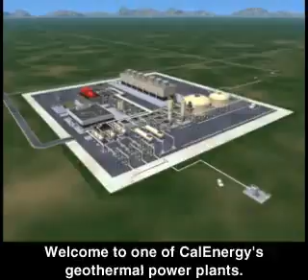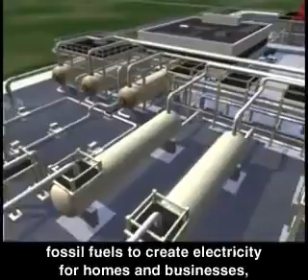Welcome to one of CalEnergy's geothermal power plants. Unlike other power plants that rely on coal or other fossil fuels to create electricity for homes and businesses, geothermal power plants use superheated fluids from the Earth's geothermal resources to generate electricity.

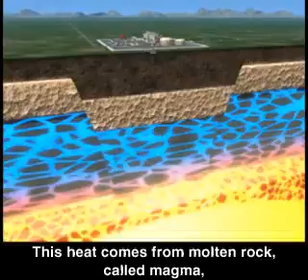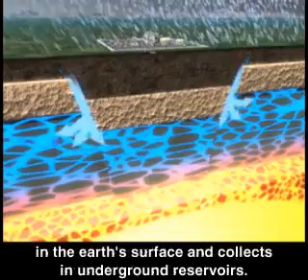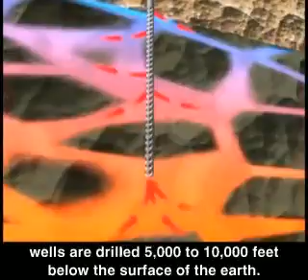To reach the superheated fluid, wells are drilled 5,000 to 10,000 feet below the surface of the Earth. These wells, called production wells, bring the superheated fluid to the Earth's surface, where it can be used to generate electricity for homes and businesses.

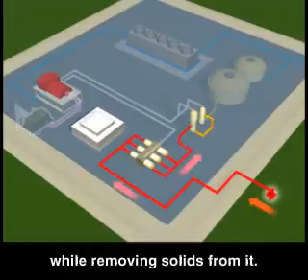This geothermal power plant uses crystallizer reactor clarifier technology, a process that turns the geothermal superheated fluid into steam while removing solids from it. The steam is used to drive a turbine and generate electricity. All remaining geothermal fluids are injected back into the reservoir for reuse.

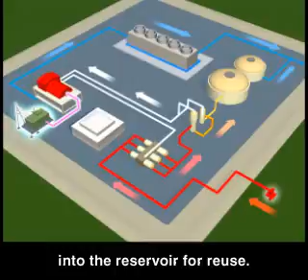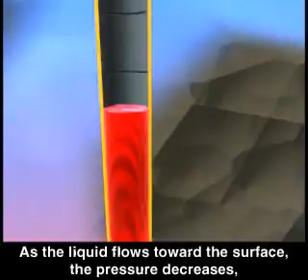Under its own pressure, superheated fluid from the geothermal resource flows naturally to the surface through production wells. As the liquid flows toward the surface, the pressure decreases, causing a small portion of the fluid still within the well to separate or flash into steam.

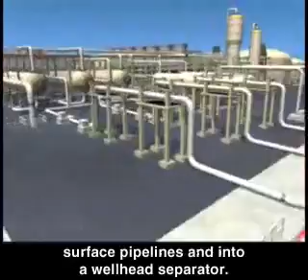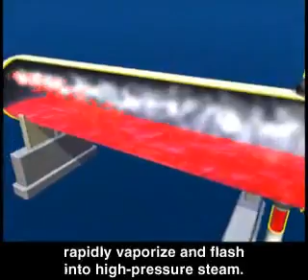At the surface, the superheated fluid and steam mixture flows through surface pipelines and into a wellhead separator. Inside the separator, the pressure of the superheated fluid is reduced. This causes a large amount of the superheated fluid to rapidly vaporize and flash into high-pressure steam.

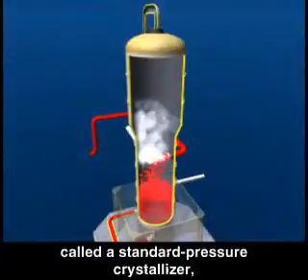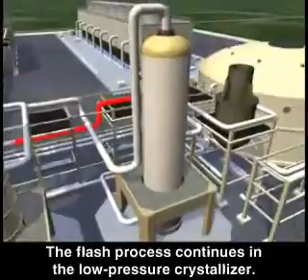The geothermal fluid that is not flashed into steam in the wellhead separator flows to a second vessel called a standard pressure crystallizer, where an additional amount of standard pressure steam is produced. The flash process continues in the low-pressure crystallizer. The remaining fluid is again flashed, this time at a lower pressure to produce low-pressure steam.

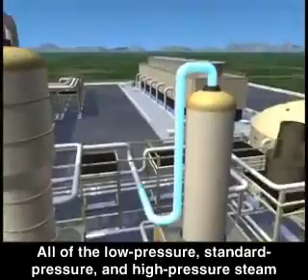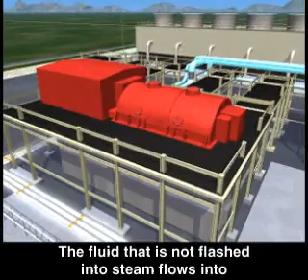All of the low-pressure, standard pressure, and high-pressure steam is delivered to a turbine. The fluid that is not flashed into steam flows into the reactor clarifier system and is then returned to the geothermal reservoir through injection wells.

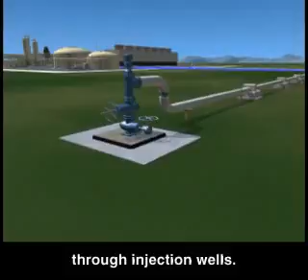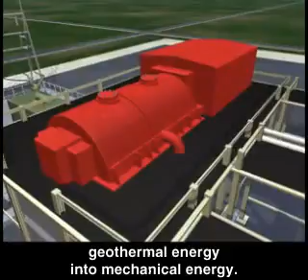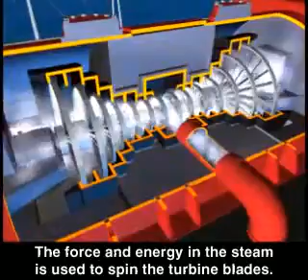Turbines are the primary piece of equipment used to transform geothermal energy into mechanical energy. Pressurized steam created from the geothermal superheated fluid flows through pipelines to large steam turbines. The force and energy in the steam is used to spin the turbine blades. The turbines turn a shaft directly connected to an electrical generator.

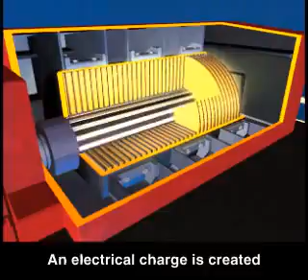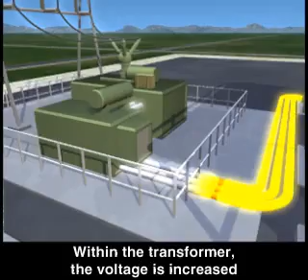An electrical charge is created when magnets rotate within the generator. Large copper bars carry the electrical charge to a step-up transformer outside the plant. Within the transformer, the voltage is increased before the power is sent to the power lines that carry it to homes and businesses.

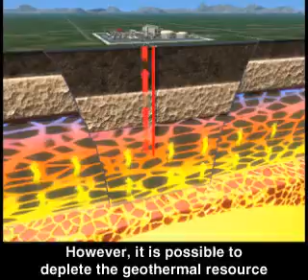Geothermal energy is a sustainable resource because with proper management, a geothermal resource can remain a renewable source of energy. Water trapped deep within the Earth will naturally replace the superheated fluid that is drawn from the geothermal resource through surface wells. However, it is possible to deplete the geothermal resource by removing fluid faster than it can be naturally replaced.

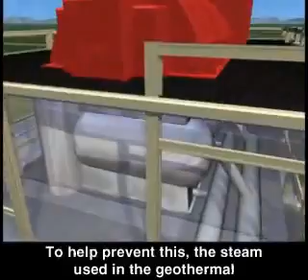To help prevent this, the steam used in the geothermal power plant passes through a condenser that turns it back into fluid. At this stage, it's possible to recover minerals from the geothermal fluid before it's injected back into the Earth.

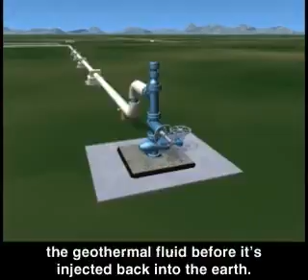This condensed fluid, along with the fluid that did not flash to steam, is injected back into the underground reservoir. Magma naturally reheats the fluid so it can be used again.